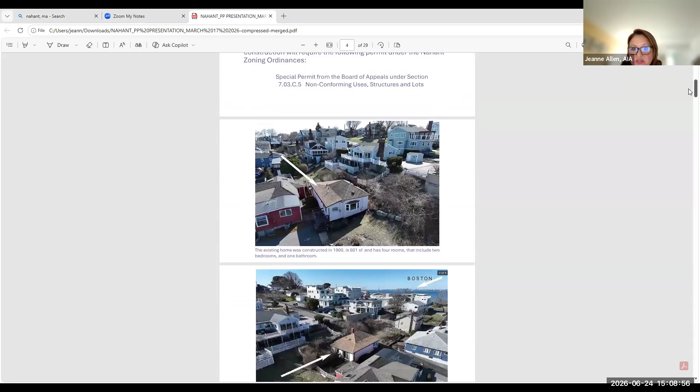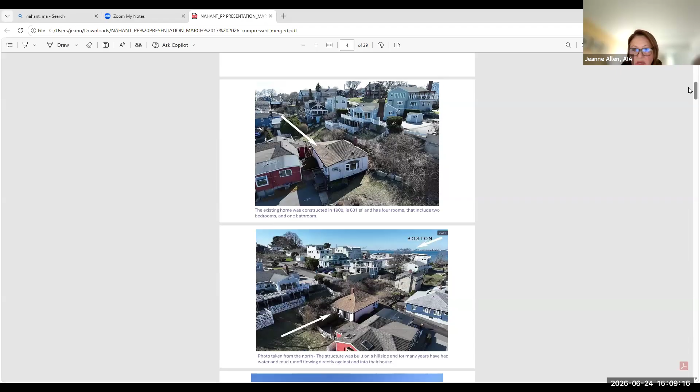Yes. Okay, so this is the PowerPoint presentation from March that we presented. And I'm just going to scroll through this just to show some of the photos that we had with this presentation. Here's 10 Fallon Way. That's 11 Fallon Way in the background, and then this is the hillside that's adjacent to our house. And this is number 7 Fallon right here. And here's another view of 10 Fallon. Here's a close-up view of the hillside that's right up against the house.

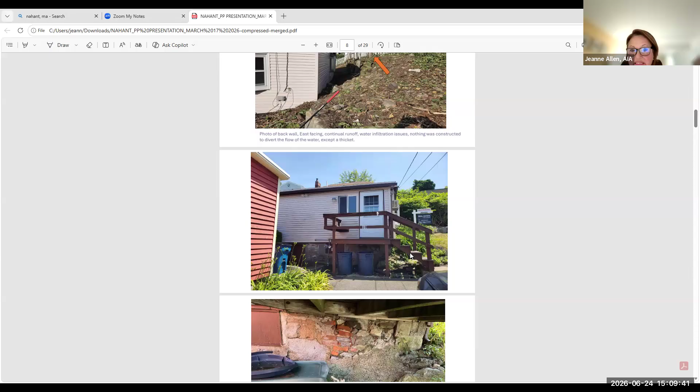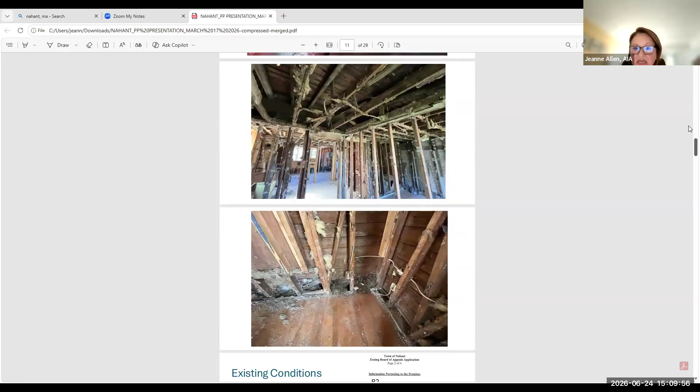And then this is the entry that's facing the roadway, 10 Fallon Way. And these are the existing stairs that are on that road that we are removing. We've all been there, just so you know. We've all been by the site. That's what we always look at. Okay. So we know that the house is in a dilapidated condition. We want to tear it down.

Okay, everyone should be muted except for Jeanne and the board.

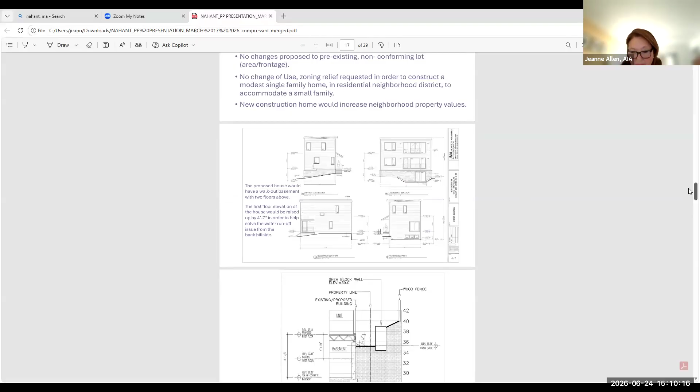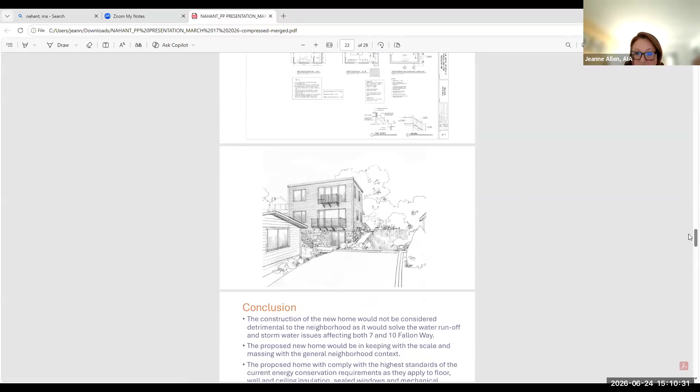We would like to demo the house and reconstruct new construction. This is the house that was presented at the last meeting. And the comments were that it was too tall. So here is a perspective view from the street. What we did for this presentation, the revisions that we made, were to take the whole house, put the basement underground, and just lower the house 4 feet. And so right now, what we're proposing is that the roof is 4 feet above the existing ridge.

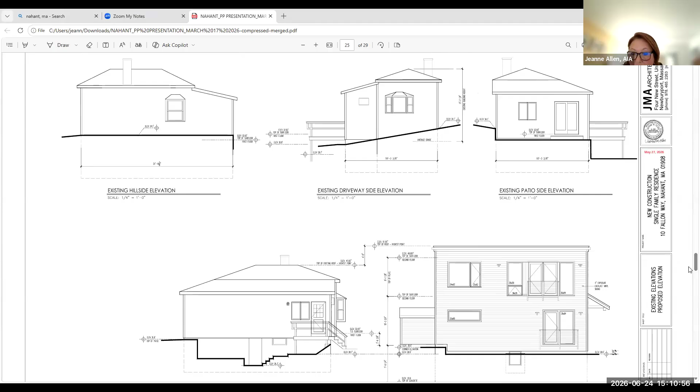What do you mean by that, Jeanne? Do you mean that it's 4 feet lower than the existing height or the prior plan? The ridge of the existing house, it's 4 feet lower, or higher, excuse me. Okay. I was just gonna say that doesn't look right to me. Okay, good. All right.

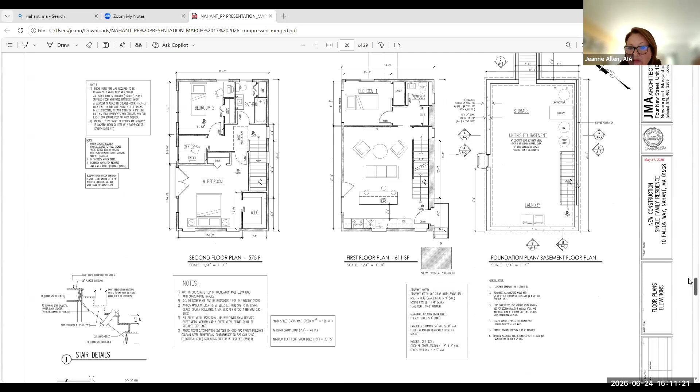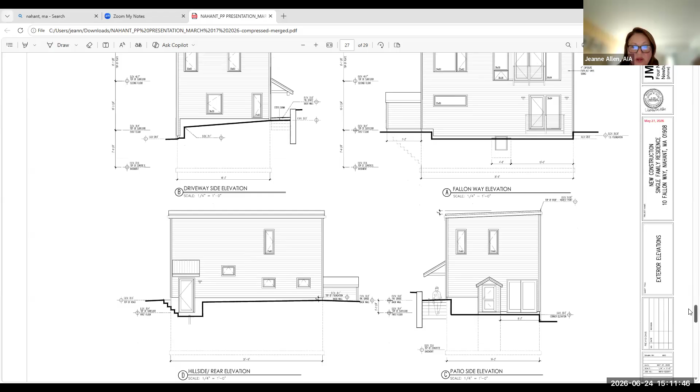So we have the same floor plans, we just lowered the house. And the basement then is all underground. And at the back of the house is actually a retaining wall. This is the side of the house that faces the slope. And that whole foundation is a retaining wall to retain all that soil. As you can see from this drawing, you can see the foundation wall.

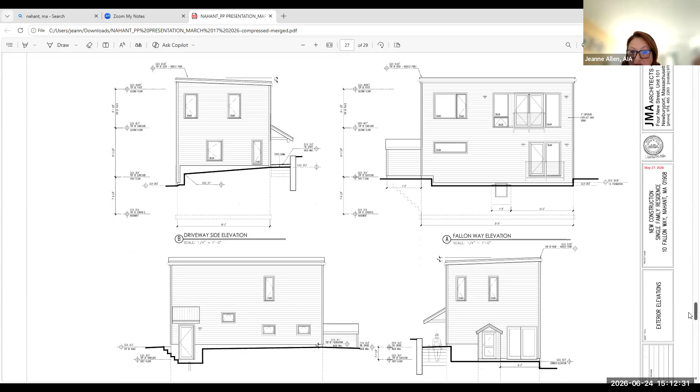And so right now we have a lot of water that is uncontrolled. It's coming from the properties above. It's running down into 10 Fallon, and it's running down the street. It's running into 7 Fallon. There's no control plan for where the water goes and how it's contained. So our site engineer has come up with a site plan where the water is controlled and filtered, so that we can keep all of the water runoff from our house from running into the adjacent properties.

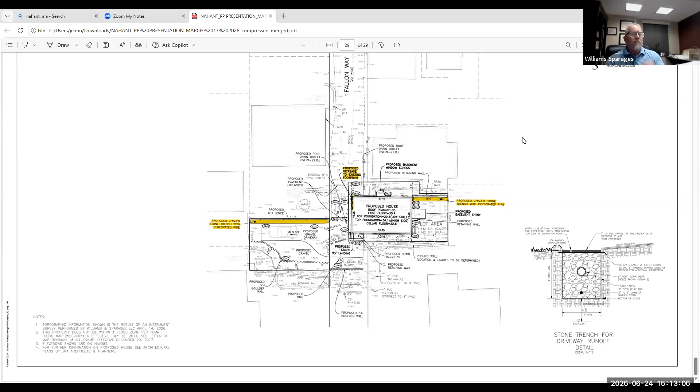Rich, do you want to talk about your site plan? Could you jump on? Our site engineer is on. Yep, I'm here. Okay. Could you talk about this site plan? Sure. And I'm going to repeat what you just said, which is that the runoff that is coming onto our property and onto the abutters property...

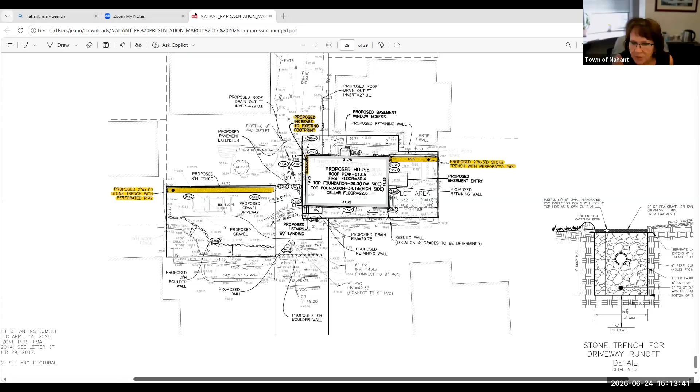Excuse me for a second, Jay. Could you just identify yourself? I apologize. Yes, my name is Rich Williams with Williams and Sparages. Our offices are in Middleton, Massachusetts. And you are a civil engineer? Yes, civil engineer. And you stamp the plans, right? You're licensed? Correct. Yep. Okay. Just want to make sure I knew who you were before we got going. Okay, keep going. Thank you, sir. No problem.

So the runoff that comes onto our property and onto the properties below is the result of runoff from above us, which we can't control. So we can't stop or control the fact that there's water coming down the hill. What we're trying to do is do our best to mitigate for that and improve the situation.

So we have proposed a few things. One is there are two drains that right now exit onto the hill from above us. The two is a 6-inch PVC and a 4-inch PVC. Our proposal is to collect those and discharge them into a drain manhole in the existing drain in Fallon Way.

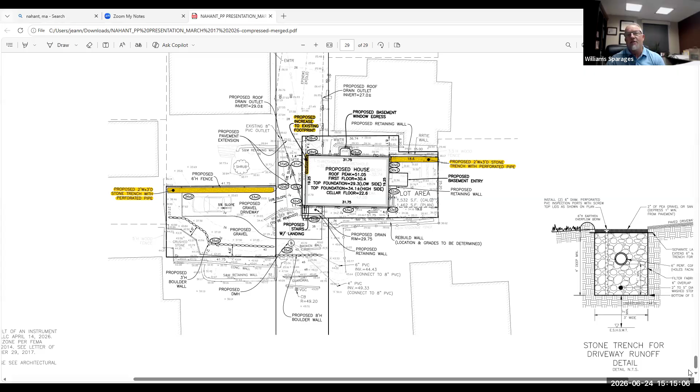And it might make sense for me to share my screen so I can point these things out. Okay. Is that okay? Yeah. Okay. Can everyone see that? Yes.

Yes. Okay. So these are the outlets from drainage that's going on above the hill. We're proposing to collect those and put them into this existing pipe. In addition to that, we've proposed a stone infiltration trench at the base of this lot to collect and infiltrate some of the runoff. It will not collect and infiltrate all of the runoff, but it is in an effort to improve the situation.

Right now, there's runoff coming off the hill, and we're not paving any of this. It's gravel now. It's going to be gravel when we're done. So we're not increasing the runoff, but adding this trench will provide some help for that. Also, we're proposing an infiltration trench here to collect runoff that comes down this way, in an effort to infiltrate in this location.

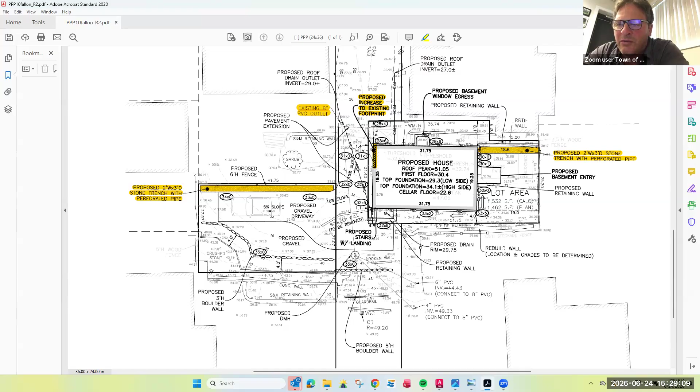So these pipes that the engineer was showing, those pipes were sitting there. I didn't put them there. Columbus didn't put them there. Somebody put them there. So we're trying to connect and make sure that the water doesn't go over the Stefanos' house. Does that make sense? Yeah, Mr. Luigi, we understand everything. You have Mr. Williams here as an engineer, and we were just discussing where things are draining. We're just trying to make sure that all the water that's coming off your roof is going into a discharge system and draining properly. That's what we're discussing right now. Okay, thank you.

So if we have no more questions on the drainage, I'd like to talk about the two letters of opposition that we received, because they are very significant, and they're from the De Stefanos, who are right next door at 7 James Avenue. The first one was from Robin De Stefano, owner and resident of 50 years in Nahant, and an abutter of 10 Fallon Way. She says that I am the primary resident affected by the construction, being 9 feet away from this house. I am not opposed to construction on this property, but I cannot support the scope of what the Arsenieros are asking. Other abutters have written letters addressing many concerns. I would like to go on record supporting their concerns as well as give you mine.

I would like to address the liability of damage to our home and the others on Fallon Way. There are going to be flatbed trucks, prefab house parts, cranes, backhoes, cement mixers, etc. on Fallon Way. All owners on Fallon Way have their water lines and gas lines under the street, which is not very well constructed. Will this weight cause line breakage, gas leaks, damage to the road? Is there an engineering report about excavation on that lot? What if my fieldstone foundation collapses due to the deep excavation of the full basement within 9 feet of my back wall? Who pays for that? I believe the basement is too deep for safe construction next to my home. I could support a one-story home on a slab or a crawl space, even if it covered more land area. I thank you for all your work on this request.

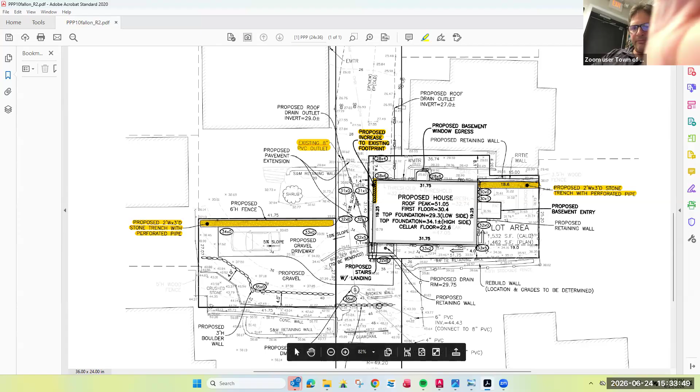So that's that. I think what would be important here too is to see the markups that were proposed. We did receive plans from the neighbors in general that had markups on them, and we can maybe address some of their concerns at this time. Does the board want to do that? Sure. Board members, you want me to open that up? Jerry, David? Yes, please do. All right.

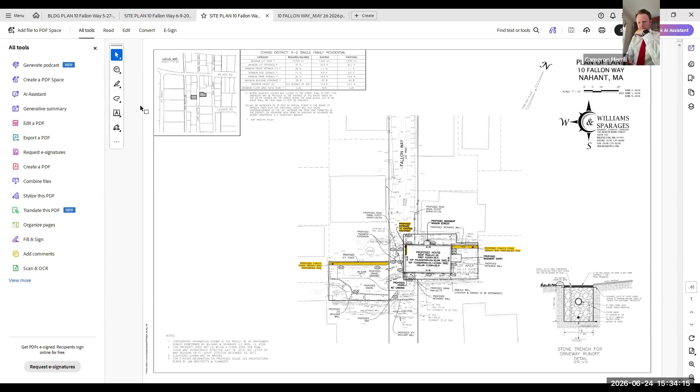Mr. Williams, could you stop sharing, and I'm going to share my stuff. Okay. So we have a copy of that. Can everyone see my screen? Yes. So the first thing we have here, I'm just going to have to move some of these tabs so I can see. Let's go to the site plan. This is the site plan that has been marked up by the neighbors, and I'm going to reduce it a little bit so you can all see it.

The neighbors sent this markup, and I believe this came from Vicky Fortino? Are you present? Yes, hi, I just got off mute. You're the one who sent the plan, correct? I'm the one who marked these up and sent them. Okay. So we've already gone over some of the issues that you've raised in your opposition here. Without doing any repetition, because it sounds like some of these things have been addressed by the engineer and by the town DPW in a good way, tell us what your remaining concerns might be.

Yeah, these were technical questions to understand the drawing. In pink highlight, I didn't know what those pipes were. I guess there are pipes there; I never saw anything like that. I did want to just close the loop on what Robin's concerns were. In blue highlight are the two downspouts. This doesn't affect me, but in fairness to Robin, we were trying to understand that downspout that ends at her property: is that going to be buried below the street? Are you saying that's a perforated pipe in a stone trench covered up by asphalt? So Mr. Williams, can you answer that?

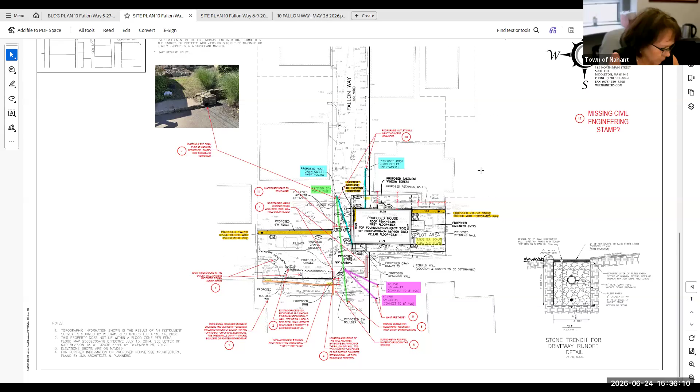Yeah, there'll be a trench. Actually, this roof all pitches in this direction, from low to high, so the whole roof can be collected on this high side and discharged here. I apologize, I just noticed that on the plan. This lower one here, we can get rid of that, so there is not a discharge over here. By over here, can you tell us what you mean? The south side, the north side? Sorry, I'm pointing at your screen thinking you can see it. The south side, yes. What color line was it? Blue. I highlighted the two roof downspouts in blue.

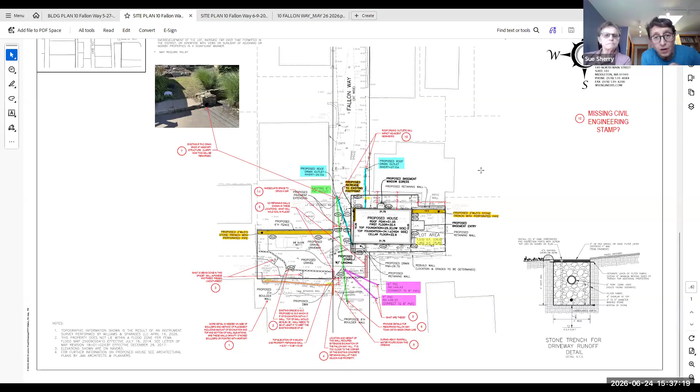Yeah, the roof drain, let me just get a direction here. That is on the east side of Fallon Way, shown in blue on your screen right now, with the stairs. Yeah, that wasn't the one I was talking about. I was talking about the other one. That one is not necessary, so we can get rid of that and just do the other blue one that will collect the whole roof, because it's a flat or pitched roof, not a peaked roof. It's pitched from south to north. I'm sorry, north to south.

Okay, so you want to drain the whole roof onto the north side? Yeah, we have a pipe on the north side of the house that's proposed to collect and discharge that. And the reason is that right now the whole roof goes onto the surface and flows onto the neighbor. So the only way to fix that is to reroute that away from them and onto the street, which is what we're doing. That's the only way to fix it.

May I ask a question? My name's Nancy Fox, and thanks for running through this. We appreciate it. Ms. Fox, what's your address? 5 Fallon Way, so I'm the house when you look at the picture where the water rushes out like it's an ocean when it rains, and it's an ice skating rink in the winter. That seagrass is my backyard there.

If you're adding to a drain, is that where you would connect into? And right about another 4 feet from there is my cellar window. So I guess you'd propose to drain the whole roof and connect into that pipe that's there now that gushes. When it rains, it's unbelievable what comes out of there. And then it floods down at the bottom of Wilson Ave, too.

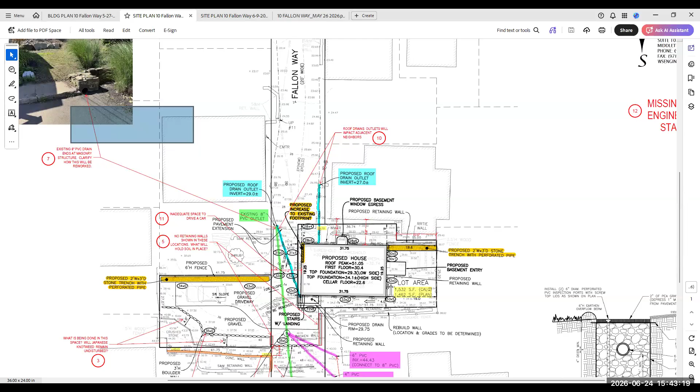So this is Zach Taylor again from the DPW. The 2 pipes that you're questioning, they must have been put in by a homeowner. I don't know if it's the existing homeowner that put it in, but those capture water from Upper Fallon Way that would have pooled in that driveway on Upper Fallon Way. And right now, those are discharging to the surface directly to 10. So those are going to be rerouted into this drain. Those are going to increase the flow, but it's just going to be during rain events.

And the roof drains will be negligible because they'll be initially discharged into a crushed stone pit. And then whatever additional water is not contained by the crushed stone is going to discharge through an existing 8-inch outlet. Again, drainage on Fallon is not ideal for anybody. So that's something that the town can look at and see if we can get subsurface drainage to connect to that existing 8-inch discharge that now discharges to the road. But I don't think you're going to be impacting the situation. You're adding water to it, but all this water is eventually getting down somewhere as it is.

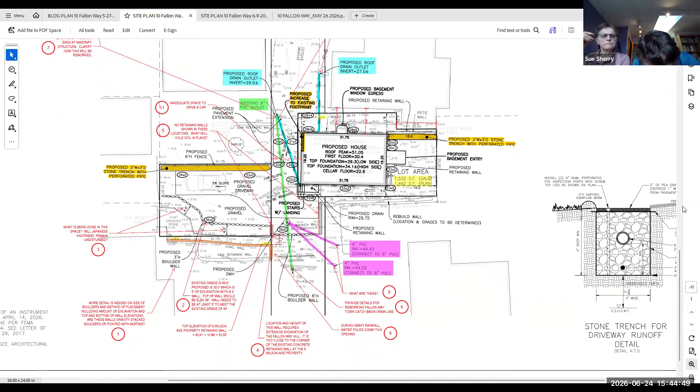Hey, Zach, there's a note on this drawing. I think you'd have to pan down, because I can't see it on the screen. My comments were numbered. I think it's number 8. During heavy rainfall, water pours down. So probably a gap in the berm up there? Yeah, there's a gap. So the catch basin at the top doesn't always catch everything. I shovel it out somewhat regularly because it just gets covered up. I agree. There's a gap, and we've had some monstrous rainstorms and it's like a waterfall coming down that hill.

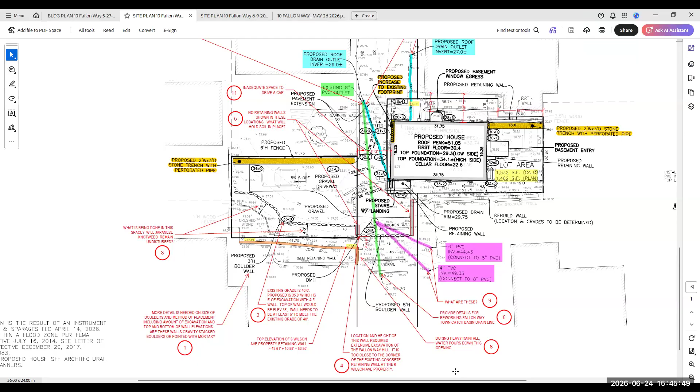Yeah, nothing is ideal up there, but now that we have the house going in, we can look at how we can improve situations that are already existing over there. But again, that's an existing issue, a town issue. And I think the issue with that 8-inch pipe discharging to the surface is also a town issue, and an issue for more people than just 10 Fallon Way. It's an issue for everybody downstream. If you want to see a picture of that, if you pan up, I embedded a picture onto this, and for people who haven't seen it, you can see that's how it discharges.

This is Attorney Lisa McGloin. I have a photo of that as well next to my client's property to the extent that's helpful. Okay. Very similar, probably better. I also want to speak at some point. We can stay on the subject of drainage for everybody, but I wanted to talk about retaining walls, particularly the 8-foot one that's going up in the right of way.

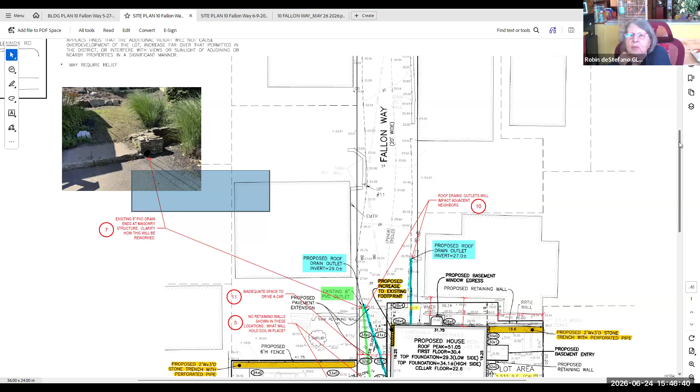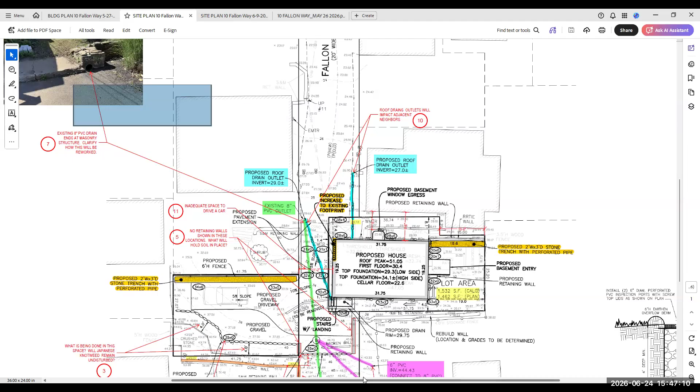Before we go off of drainage, I have one more request of clarification. I did want to talk about this blue line that dumps into my basement from the house, and someone did comment that it was not going to be there. I just want to be guaranteed, because not only does the blue line dump right into my cellar doorway, but it also is on my property and goes underneath my air conditioner. Yeah, Robin, they said they could eliminate that. That clears up what I wanted clarification on. That clears up a lot of heartburn for me as well. Yeah, we can get rid of that.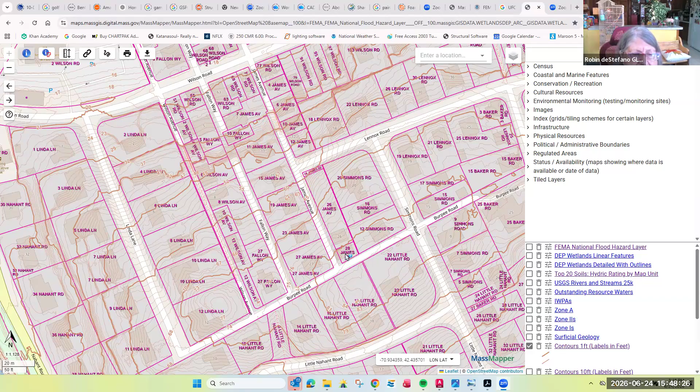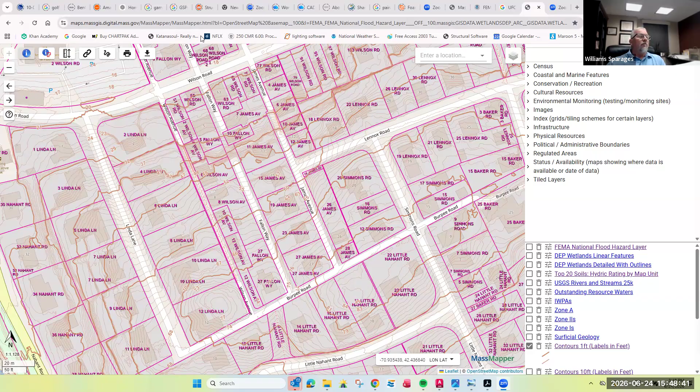It's created by... what's that? I said, we know that it's not created by 10 Fallon. No, I appreciate that. I just wanted to show, so that everyone could see how much it is, on a map. Okay. Thank you so much. All right. I'll stop. So back to the members. Did everyone have all their questions asked so far regarding drainage and the plans that were provided to us?

I guess not really. Yeah, I have a question, I think it's Jocelyn. I mean, go ahead, Kevin. I appreciate the plans and the changes, but this is a question I asked at the last hearing and I was hoping to have resolved by now, and I don't think it is. I'm actually even more confused. There's new construction there. We're expanding a bump out for stairs and we're expanding what looks like a window well, yet the building coverage numbers didn't change.

We have an unexplainable existing FAR number at 0.45 when I don't think that's accurate. And we have a proposed FAR number, which I'm having trouble calculating. So to me, it looks like we have maybe a special permit and a variance, and the special permit wasn't applied for. But I shouldn't have to guess; this should be presented to us with explanations for why the relief is being requested. And so that's my big concern. What's the context that we're even reviewing this under? Substantially more detrimental or variance? I think it's a variance on FAR, but I'd love to hear why that might not be the case.

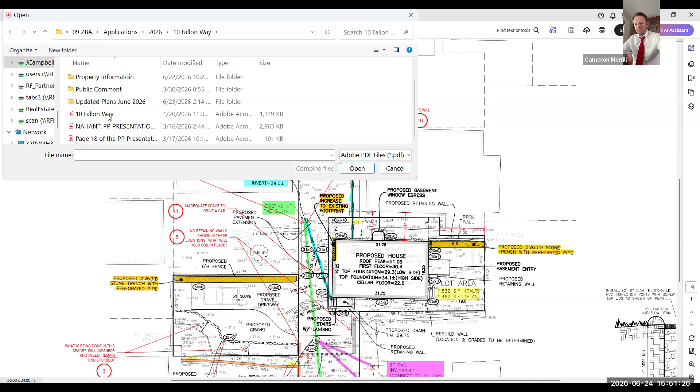The basement would not be counted for FAR, right? I agree with you based on the fact that it's 6'11" instead of 7 feet. Okay. But if the basement's still not included for FAR, why would we be doubling FAR? Wait, if you just let me finish, I'll clarify. So we're creating a new nonconformity of floor area ratio, which almost doubles the allowed floor area ratio. So I want to square that away with all of the things that we've heard. We're not in compliance with FAR with what we're proposing. This is true. But the egress window and the basement access was not included in the FAR calculation. Right. We also have building coverage, and I believe that those two things would add to building coverage.

And we also own another land on the right-hand side, sir? I don't know. These are the questions I'm asking. I don't present the answers to these questions. I should be told the answers to these questions. So what we thought we knew is that we have another piece of land on the right-hand side that, because the road is dividing it, they're telling us they're not sure if you can combine those two lots together. When it comes to paying taxes, there's two deeds. We've been paying taxes on that piece of land and on the house.

So I was trying to get a lawyer to come in and represent us for that. We're not trying to do anything wrong. So if you put the two lots together, we felt that we're asking 600 square feet more to go up. And the reason why we're asking for the extra space is because we have two grandchildren that we're adopting, that we're trying to raise. Now, it's been a year and some months, right?

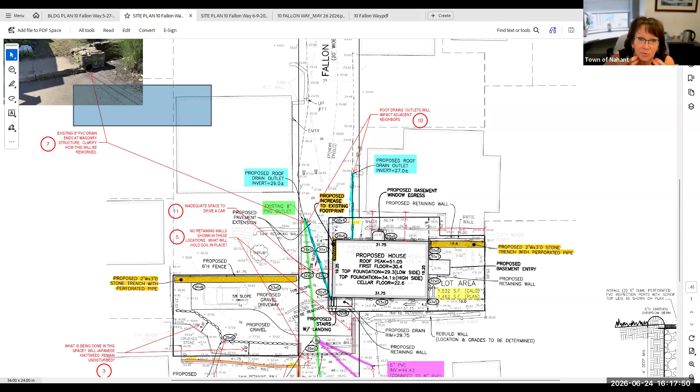Right. It's not our hunt. We're not supposed to do that. That's not our role. Correct. Can I just share something for a moment about this, the right of way? Yes, sir. Certainly. We usually don't, when we're discussing, we don't take this in, but for you, yes, go ahead. I just want to show you something, if you don't mind. I have to stop sharing if you're going to do that. Okay, go ahead. We all have this plan as well.

Yeah, so the right of way has a jog in it from 1954. Right. So this plan is 70 years old, and shows Fallon Way like we're showing it, with a jog in it. So if Fallon Way was accepted, it would be shaped like it's shown on the plan. That may be accurate, sir, but from a legal perspective, just so you know, if it's accepted, the town then owns the entire way, okay? And they can force a homeowner to remove any obstructions in the way.

And no one has the right to encroach on a public way. And we don't have any right to grant any relief in a public way. However, this could have been a discontinued area. Many things could have happened. There's several different ways. And as David Walsh pointed out initially, the assessor said there's a possibility that it wasn't even done properly. So we need to look at that, but we just found out about it yesterday. So we can't. Okay, I understand.

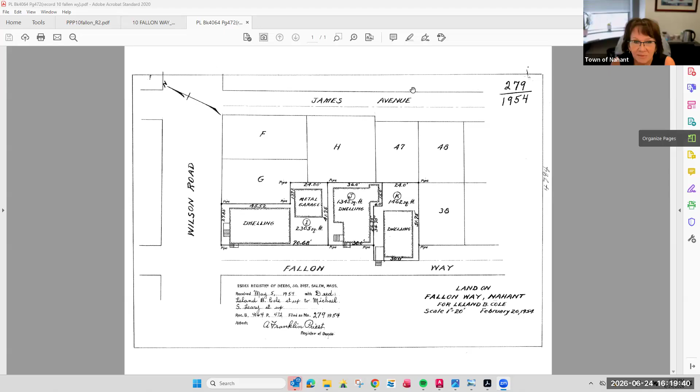I understand your point that maybe when they accepted it, they didn't accept it by a plan. They wouldn't have, no, because they would have had to do their own survey, etc. So we'll find out what was done, what wasn't done once we see the history of it. Unfortunately, it's election day in town, and so the parties that be could not devote the time to it today. Okay, and then I have one other question.

When you say that you want the town to look at all this engineering, what does that mean? Like, how do we go about doing that? Well, from my perspective, I'd like to see the town take a look at the application for the zoning relief, take a look at the application for the permit, actually first, and see whether or not this foundation, this basement is something that they would allow so close to the other house. But what departments in the town are you talking about? The building department. Okay. Can I jump in for a minute? Not right now, sir. Hang on. Okay. All right, so we're back to our board members.

Cam, Jerry, David, what do you think? Scott, what do you want to do? I would consider continuing this. This would be the best thing to do. How much time do they need? And what are we asking them to do in that time, though? Well, it kind of depends. We need to look into our right of way, and then we need to look into if it's a variance or if it's a special permit. That's something that we need to look into before we can have another meeting, or how long is that going to take us to figure out? Cam? Scott? I mean, for me, it's quick. It's just once we get the math.